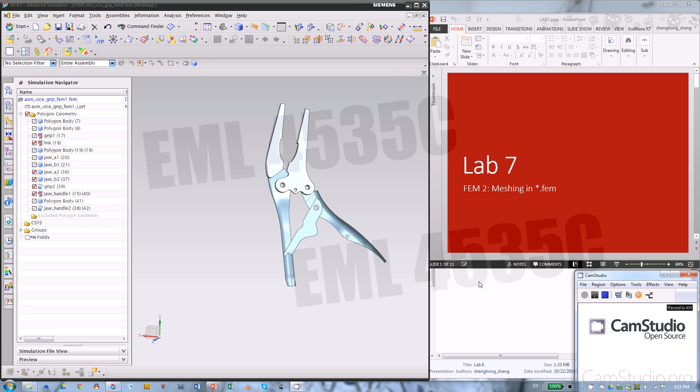Okay, this is a lab for the second FEM part, and also lab 7. Today we're gonna mesh the polygon we modified from last lab. So here's the plan for the later half of the semester. We have lab 6. We did some modification on the idealized part. Then lab 7 we're gonna make the mesh. Next week we're going to do the FEM assembly, and last lab we are going to apply boundary conditions, loads, then we're going to run the model.

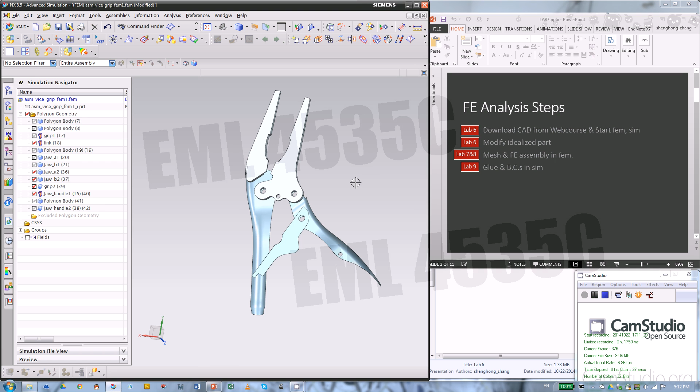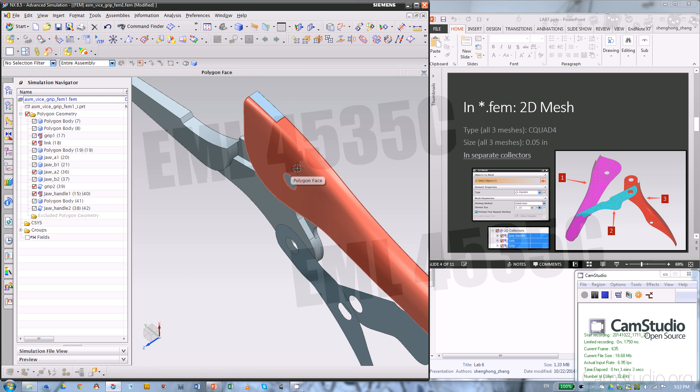So today it's very fast. You should have this from lab 6. Then first we're going to mesh all three pieces into 2D mesh. So make sure you have the piece of the jaw handle that is cut. There's a cut on the jaw handle, so you don't want to use that piece to generate the 2D mesh.

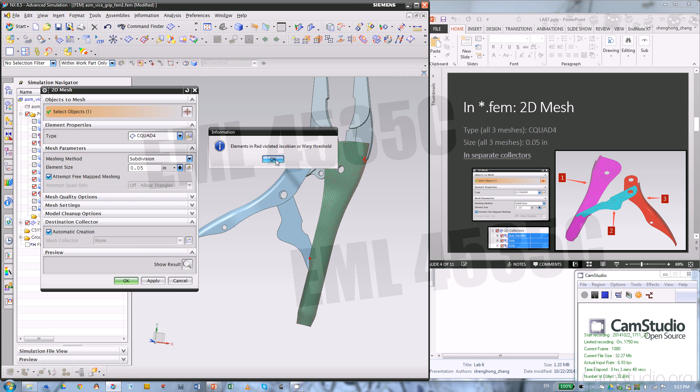Okay, now let's start with the 2D mesh, and type quad 4 as it says here, and the size is 0.05 inch. You can check this. Then we want to mesh them one by one. So first piece and apply. Okay, it'll say the element quality is not very good because it violated this, but it can still run. It's just not a very good quality, but in terms of our class that's totally fine.

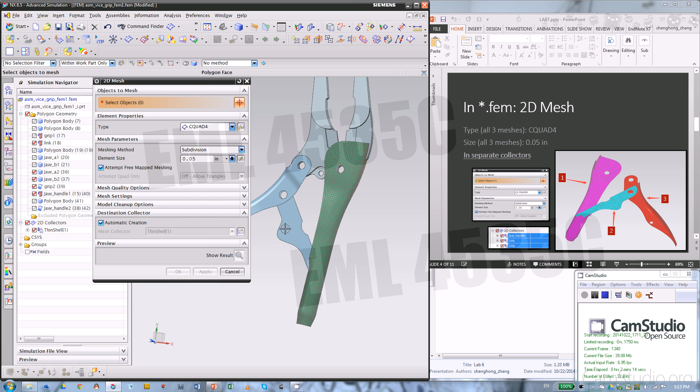So we have one piece in the 2D collector, then we need to mesh the other piece with exactly the same parameters, and also you want another collector, so you need to make sure this one is checked, auto creation. So apply. Now we can apply for the third piece. So that's all for these three pieces of mesh.

If you would like to, you can change the name. Okay, rename, and that's jaw handle. The second piece, I think that's the link. The third piece is our grip. So I accidentally double click. It's the same thing. Okay, and as you can see, I have different colors here.

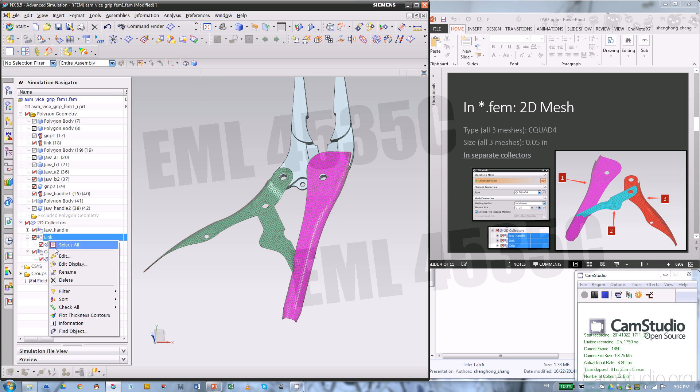How to make that? You can right click on the collector, edit display. So I think this one is this. So I'll use the first color, apply, and the link. Okay, any color you like. Might be this one. The last one is red. Okay, so that's all for the 2D mesh.

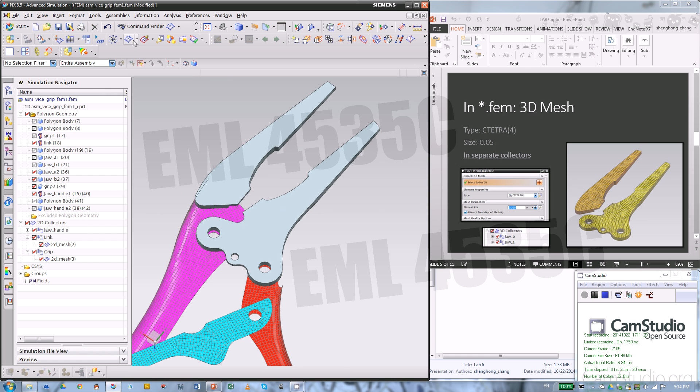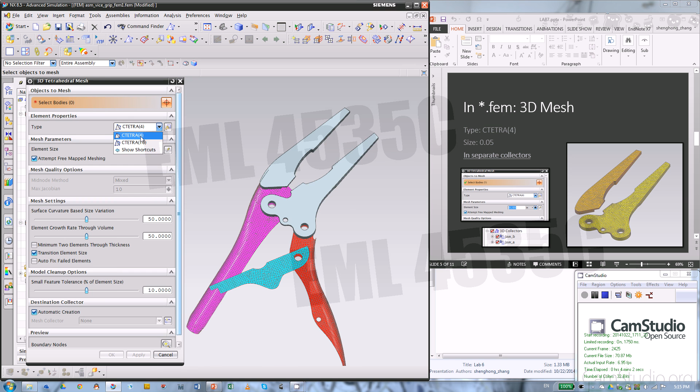Then next is our 3D mesh. Again, that's the same size, and that's the tetra, 3D tetra, and we use linear tetra because those two pieces are relatively strong in this jaw handle, in this whole model. So if this model deforms, the bigger deformation will be on the handles instead of the solid parts here. So it makes little difference if you use a parabolic or a linear tetra. That's why we just need to use this.

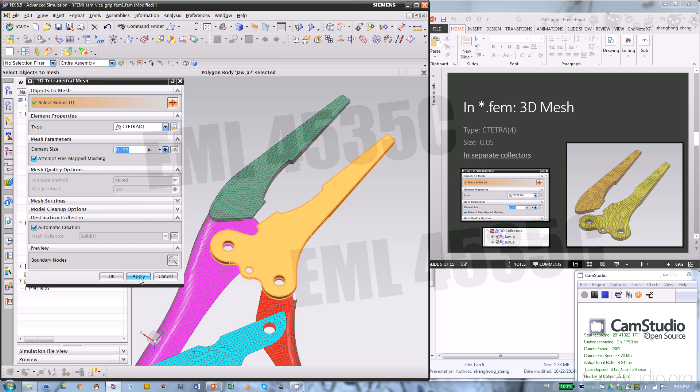So for both of them, they're 0.05 inch, and you don't have to play with those. Let's say apply for the first one, then pick the second one, also auto creation, then apply. Alright, now we have two pieces of mesh, 3D mesh. You can rename them. I'm gonna skip that, and you should have two different collectors. You can also change the color if you'd like to.

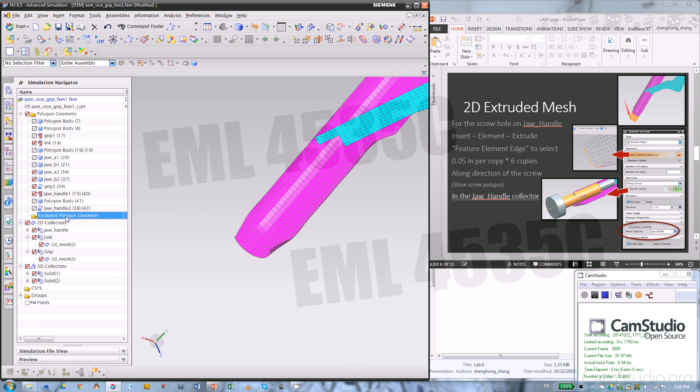Then the next step is the screw hole for the screw on the jaw handle. So if you look at this piece, where's that? I think I hid those here. Anyway, so if you look at the actual polygon for the jaw handle, there's a cylinder here. Okay. However, on the mesh we don't have that. So for this piece, the midface is also disconnected from the midface of your jaw handle. So we don't use that. We just simply extrude this edge into a mesh.

So how do we do that? We insert element and extrude. And we're going to extrude this edge. So I would like to pick this element edge. And of course you can hand pick this, but we have this method here. We can use feature element edge and pick one of the edges on this long edge, and they will be picked up.

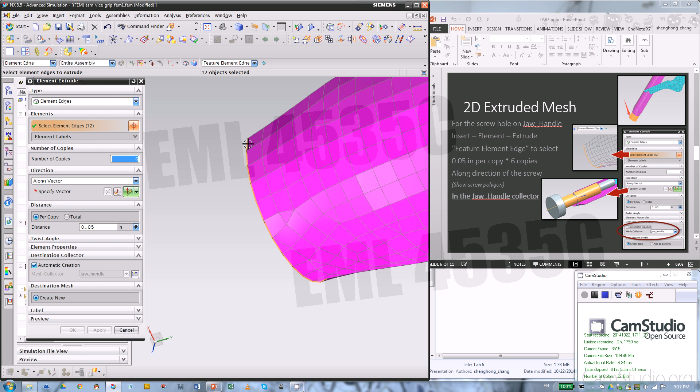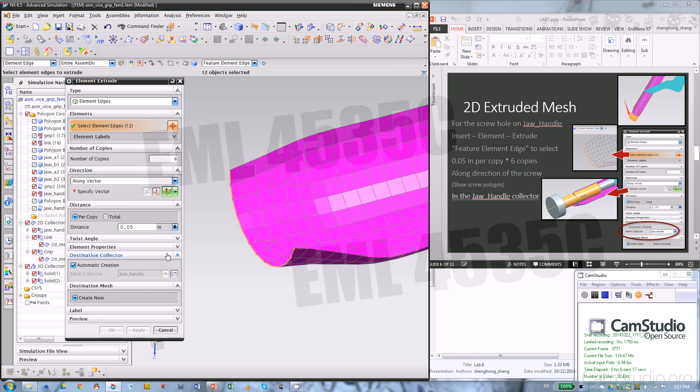Then this cylinder is 0.3 inch long, so I have 6 copies of the mesh, and per copy is 0.05, which is exactly the same size of the 2D mesh on this piece. Okay, so that'll make them match each other. And the tricky part is the vector, which direction you want to extrude this. And this is not on X, Y, or Z. That's kind of a tilted axis or vector.

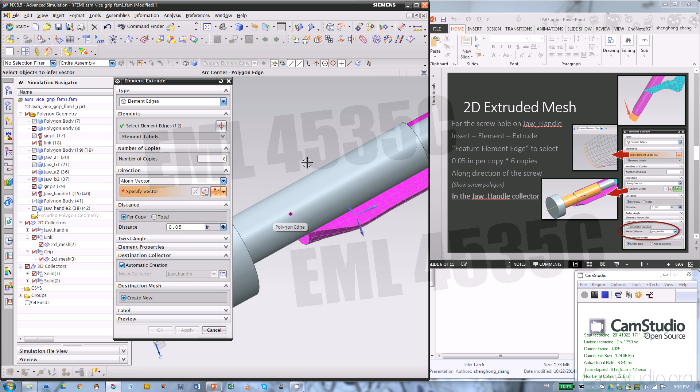So we need the help of the polygon. You can use either the screw or this one. As long as you have that cylindrical face, you can pick. So when you click here, define the vector, and you can pick either cylindrical face. I'll pick this one. And the direction, we need to flip this to extrude the other way and apply. Let's hide the polygon.

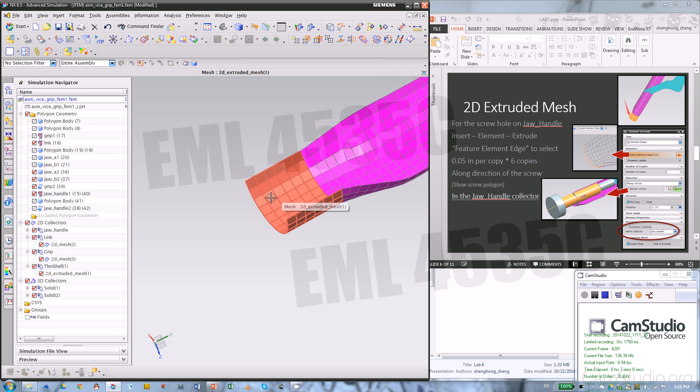So that's the extruded part. Since this is extruded, this piece of mesh and this jaw handle mesh are connected. There's no duplicate nodes along this edge, which means if you do a simulation, the computer will think they are a single piece of mesh.

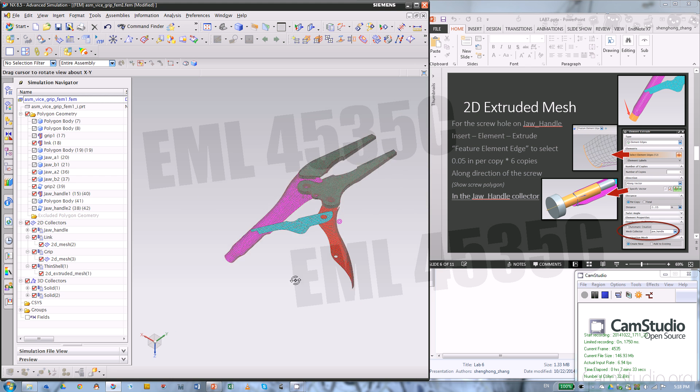Alright, now that's all for this half of the whole model, if you look from this direction. Now we need to reflect this everything to the other side.

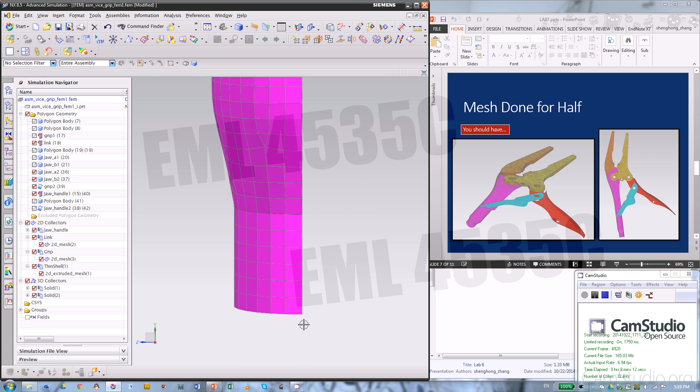As we said in lab 6, the advantage of this will be you can apply force on the symmetry plane, because we made our mesh on the symmetry plane, so we will have a line of face of nodes on the symmetry plane. If you simply just mesh the whole piece, you're not guaranteed to have one node right on the symmetry plane. Also you can have boundary conditions applied dead on the symmetry plane.

That's why the whole thing is symmetric. That means if you apply symmetric boundary condition, you would have symmetric results.

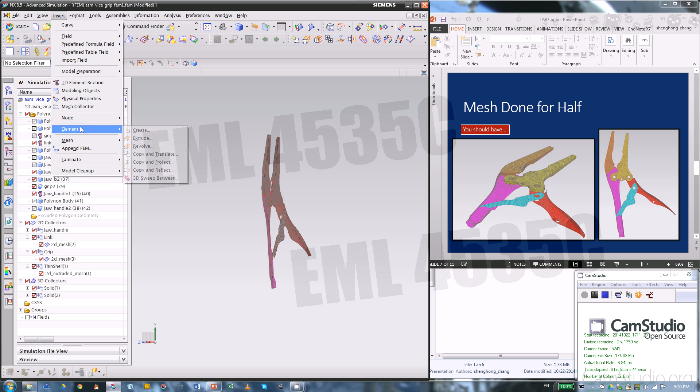Alright, insert element, copy and reflect. One thing to notice is we don't need to reflect the link because it's in the middle, so we can hide that piece here, and also we don't need polygons. So that's everything we need to reflect.

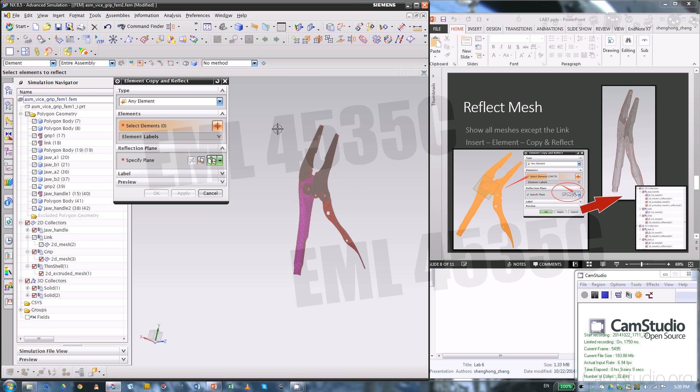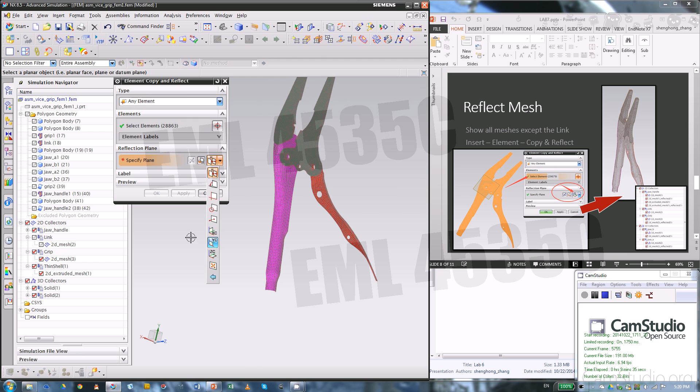You can just box select everything, and the numbers of the elements, it changes. Sometimes you probably have a little bit more than this, it depends on your computer, or I don't know. The reflection plane is XY plane, so you need to pick that ZC. That's your symmetry plane. Say OK.

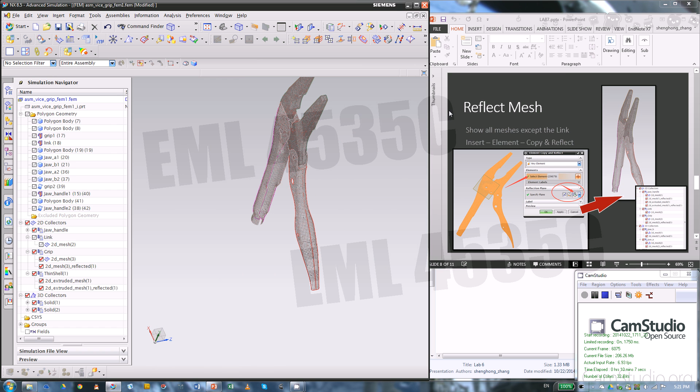And now that's everything. If we turn to wireframe, you can see clearly there's an edge in the middle that indicates those are two meshes. But if they're connected or not, it's the other matter. So let's take a look.

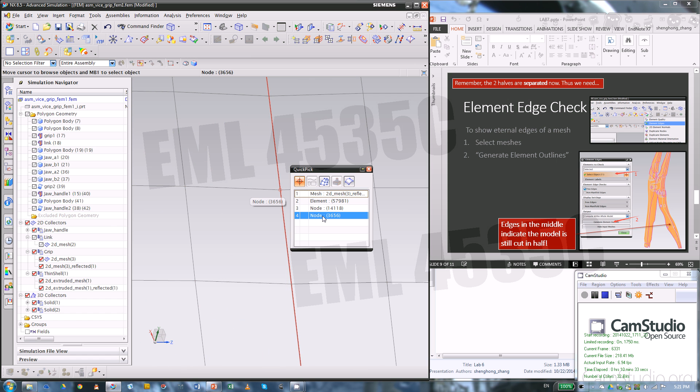Since we reflected everything, we also reflected the nodes on the symmetry plane, or the edge, the nodes on the edge of the symmetry plane. That means we have, for example, this spot, we have two nodes - one is on the original copy, the other is the reflected one. So we have duplicated nodes on the symmetry plane. And since one node belongs to one side, the other belongs to the other side, that means those two meshes are separated. If you apply a force here and pull that thing from the other direction, they will separate.

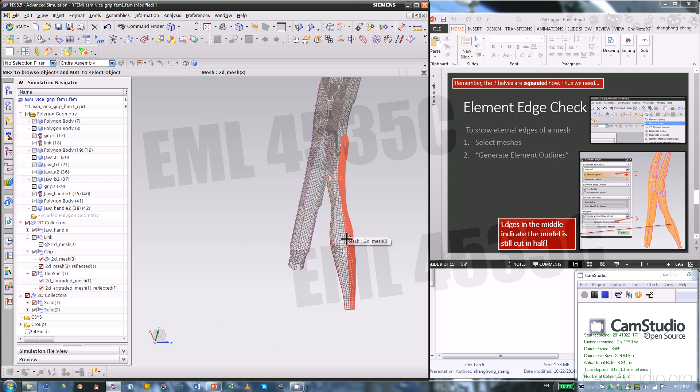And how do we combine those two together? How do we check if they are a single piece or not? We can use element edge, that's a tool to check the external edge of mesh. So pick everything and generate element outline.

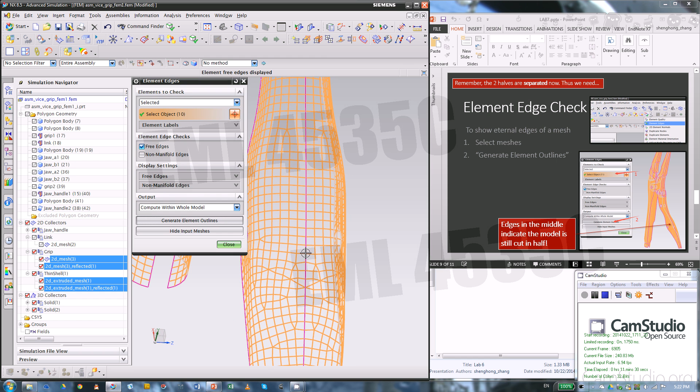As you can see, we have an outline in the middle of the mesh. So it says this edge is outside of this mesh, that means they are separated. You do not want to see an edge inside a piece of mesh if you think that's a single piece. So what do we do? By the way, if you want to take out the blue line, you can just refresh.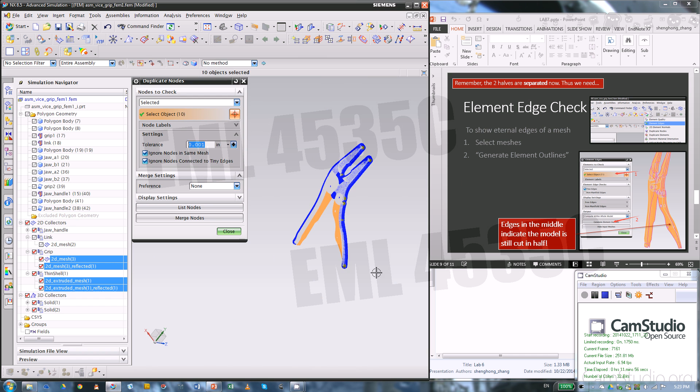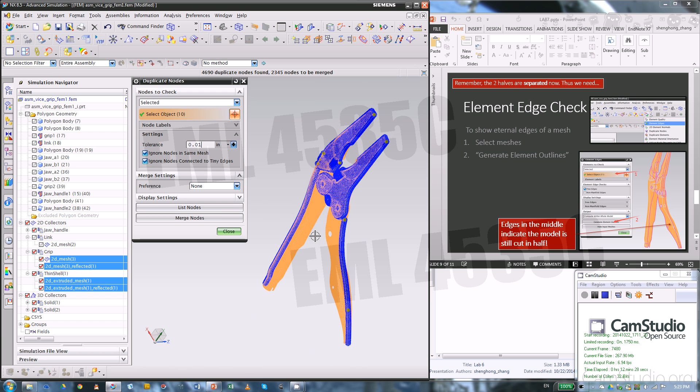We merge duplicated nodes, pick everything, and it should show us those nodes that are duplicates. Sometimes, if there's something missing, you can play with the tolerance and hit enter. You do want to merge all the nodes that are on the symmetry plane. Sometimes the tolerance is different, so 0.01 is a good tolerance, and merge the nodes.

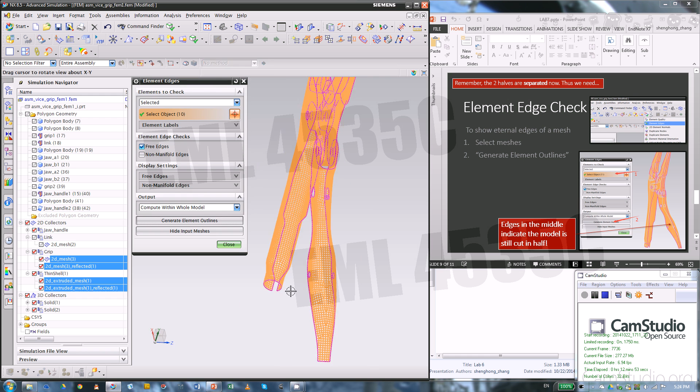How do we know it's merged? We're gonna do another edge, element edge check. Pick everything and generate outline. Now this time there's no edge in the middle, which means now when you run a simulation, this is a single piece, or those two meshes are connected.

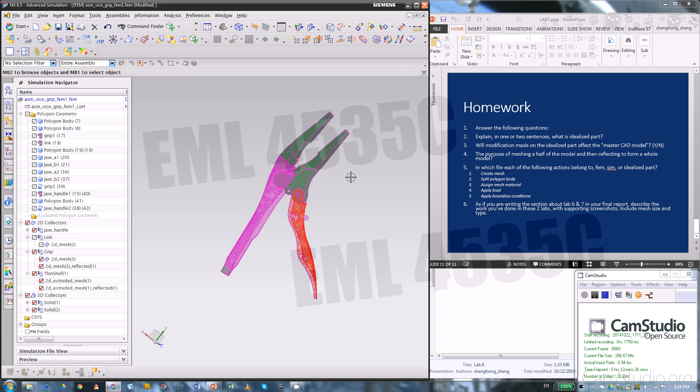And that's all for this lab. It's kind of short, but we do have homework. So you need to know some of the basic concepts in the process of the FEM, and also you need to write up the steps so far from lab 6 to lab 7, so eventually you can put this homework into your final report. Alright, that's all. Thank you.